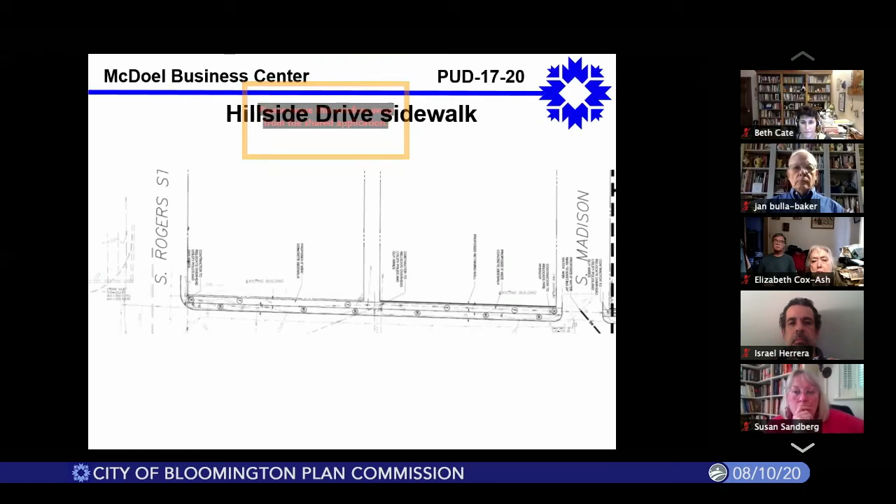That's obviously a big impact, as it allows pedestrians to get to this site and also to Switchyard Park further to the east, extending all the way to Rogers Street. The right-of-way is very narrow along Hillside Drive, so there's just barely enough room to fit in a sidewalk and tree plot along that frontage.

With this petition, the petitioners are proposing that the multifamily buildings be designed to Silver LEED certification, and a similar certification or design requirement would be carried forward with the single-family houses as well.

The petitioner has given us several perspective elevations of what these single-family buildings could look like within this development, shown here on these renderings with comparable building styles designed for this site. One thing staff would prefer to see, hopefully by the time this goes to the next hearing, would be actual elevations with more specific requirements for the single-family residences, such as depth of front porch, height, gable elements, and similar details, to give a better concrete idea of what these buildings would look like.

For the multifamily buildings, we don't have any specific renderings yet, though they have given us a couple of perspective elevations of what these could look like. As with the single-family residences, the department would like to see specific renderings of what the actual buildings would look like on this site, so we can review how that would work together with the single-family houses.

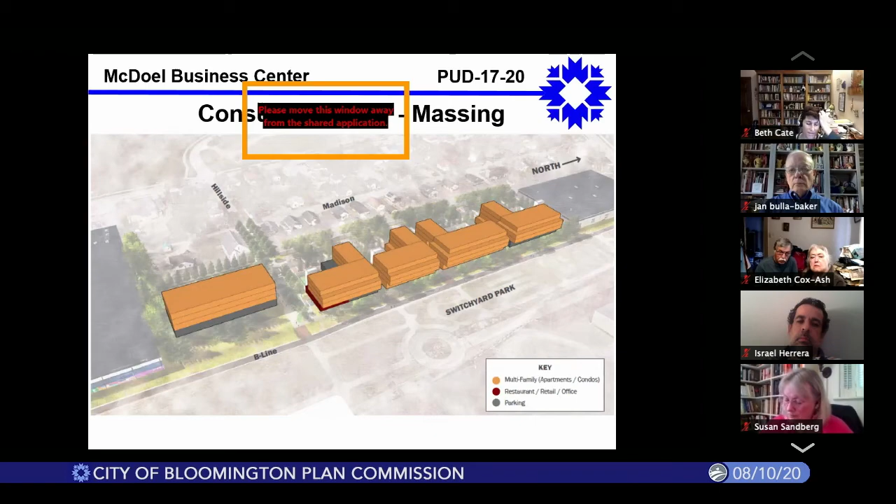One other thing I want to point out is this study was done internally—it was not a publicly vetted study that the neighborhood and other people were involved with. It was just a way to give an idea of how this site could be redeveloped to get density along the trail, while not being intrusive to the single family neighborhood to the west.

This is another rendering showing that elevation and the buildings. They're 4-story buildings along the front, stepping back to the west with parking areas up against the neighborhood to create a visual buffer. This perspective plan shows multifamily uses along the trail, with taller buildings along the trail stepping back as you get closer to the single family neighborhood.

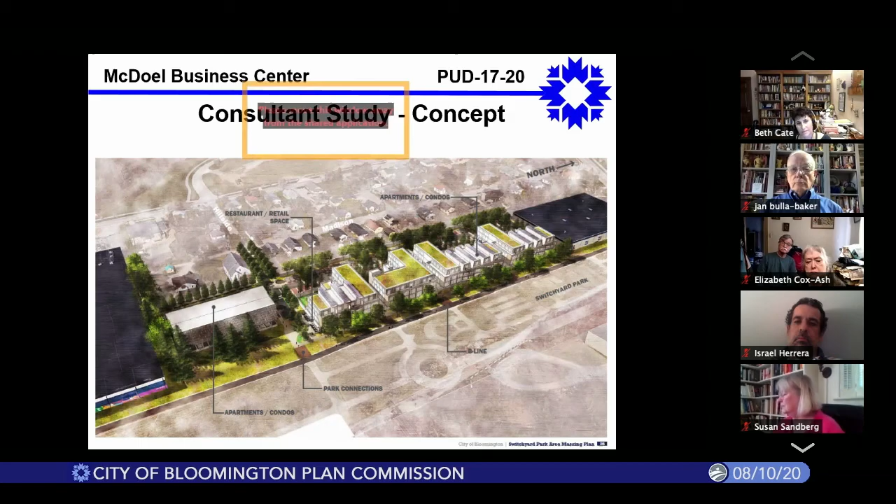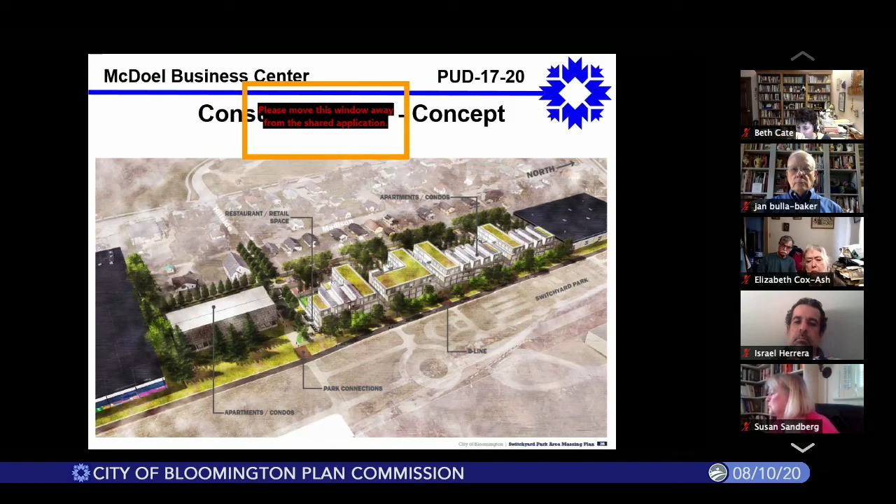While the department is not saying this is exactly what has to be done, this perspective style and density is something we really want to encourage and promote along the trail. So one area we have open for discussion tonight is the development being proposed versus what might be a better, more appropriate design specifically for Switchyard Park.

With this development, the petitioner is proposing to utilize the R4 standards for the single family lots. There are specific reductions in the setbacks being requested for those lots from the R4 district, related to minimum lot size, setbacks, and the subdivision request.

The traditional subdivision requires a minimum of 67% of lots to be served by alley. There's only one alley with this specific development, so only 43% of the lots are served by that alley.

Some of the other reductions deal with the minimum landscaped area, as well as architectural requirements for articulation of the buildings, the step backs, and parking spaces. The UDO requires a minimum number of parking spaces for multifamily projects adjacent to R3 or R4 neighborhoods, and this development would have a reduction from that minimum—112 spaces would be required, and 54 spaces are proposed within the ground floor of those two buildings. These reductions are all outlined in staff's report.

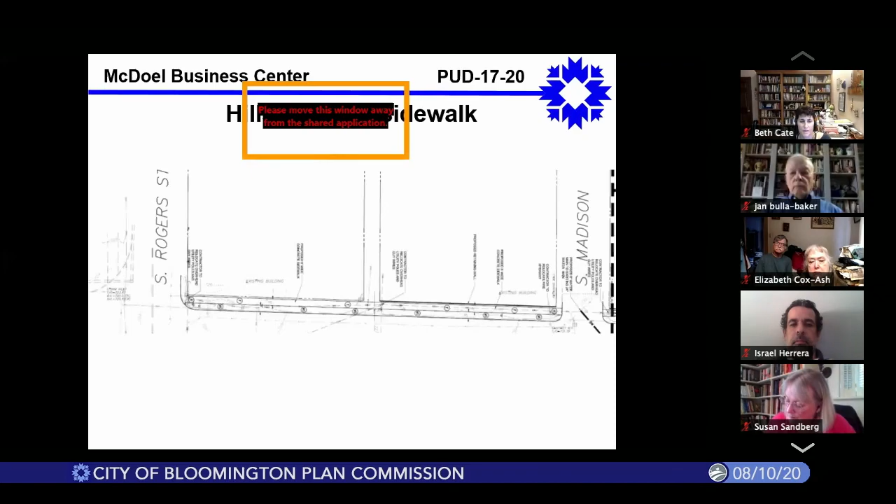All right, thank you, Eric. Is there a representative of the petitioner who would like to add to the presentation?

There are a few, I think. I don't know who wants to speak. Can you guys put your hand up on the virtual hand? I'm trying to unmute you, Jeff, if it's you.

Hello, I'm here. Great, there's Doug. Thank you. Okay, hi Doug. Yeah, I'll start this. Thank you for hearing us this evening.

Tom Brennan, the owner, is actually texting me. He's having some technical difficulties, but he would really like to speak to his petition here. As soon as he gets on, I'm sure he'll pop in. But I'll try to answer a few things and get some stuff started. I'm moving my daughter into college, so I'm in a hotel room in Oxford, Mississippi right now.

First, a couple of things. I was going to speak to the architecture, and we've taken quite a bit of feedback, and that's why you haven't seen our renderings yet of the project, because we're making changes based on some feedback we've heard.

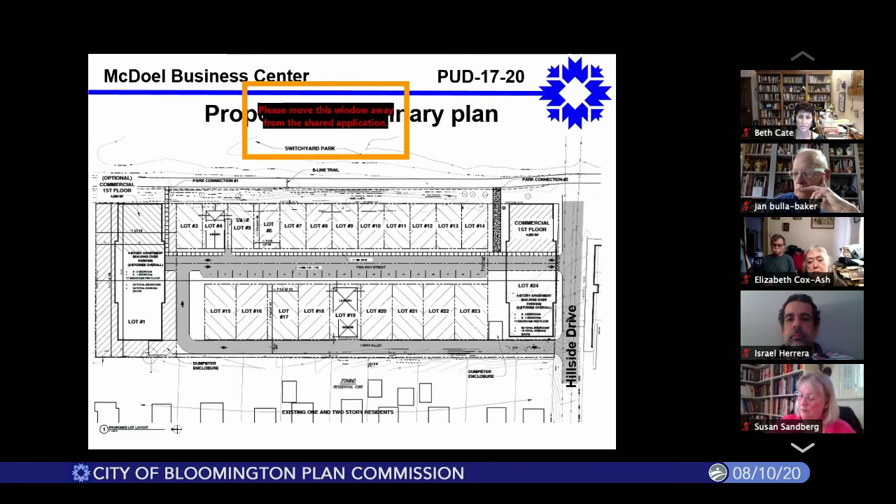So there's almost no uses for our site that would work under the current PUD, which is why we need to modify it. We've met with the neighborhood and tried to, at least some of the executive committee, and I believe my client has had some discussions with others about what we're trying to do here as far as small scale residential development.

That's the thing I think the consultant's plan loses track of completely. Tom mentioned this to me this morning - the consultant's plan is from a consultant in Indianapolis, not somebody that lives here or owns this building. Tom has looked at this, walked the neighborhood, spoke to the neighbors, and said we need some single family homes. This is not a bunch of tall, multi-story, high density buildings here.

We could certainly work on some changes to this site, but we still feel it's really important to have some houses here. We've heard some feedback that perhaps some townhomes would be desirable, and we certainly agree, because townhomes are smaller footprint - usually 21 to 24 feet wide. We've been working on a site plan that might get 12 of them along the B line that would look more like brownstones or walk-ups, facing the park with maybe parking on the back side. So there are things we're working on.

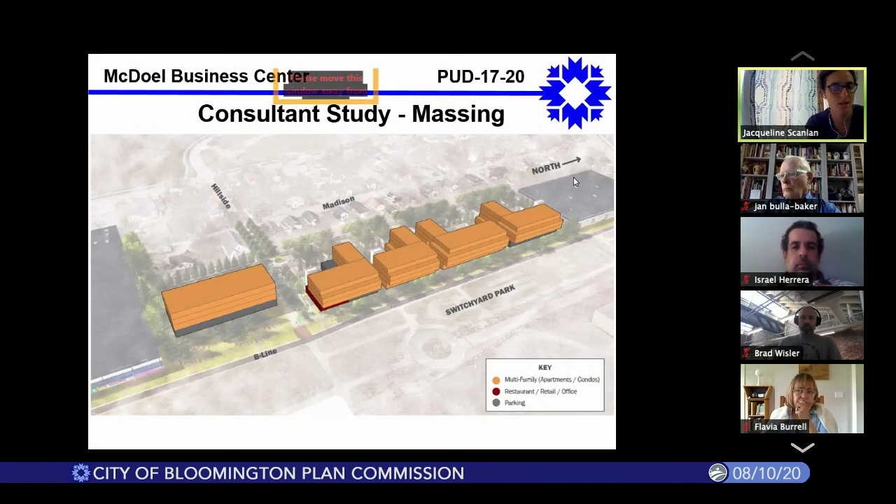Okay, thank you for that explanation. Eric, can you show the massing sheet again? Yeah, so those would be multifamily buildings, and you can see a small bit of commercial there at the corner of Hillside and Switchyard, and then parking underneath in at least 3 of the buildings, I believe. But the rest would be multifamily, either apartments or condos, so probably some mix.

Okay, go ahead. No, that's okay, I was just going to say we would have to look and see which plan was done before the new UDO was done. So we would have to look and see which zoning districts would accommodate the kind of densities thereafter, basically.

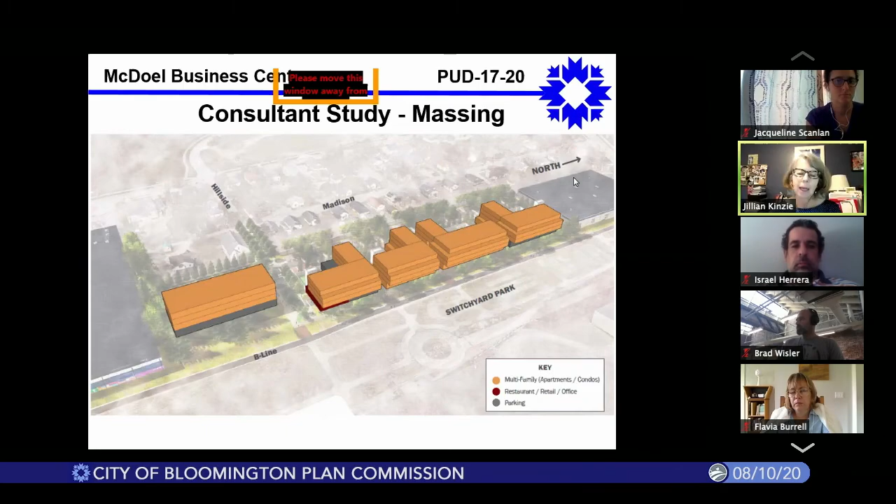Okay, I'm also interested in talking a little bit about Hillside and concerns about that as the sole entry point for this development. Is there anything about expansion? It is tight, there's no denying that, and there are concerns about traffic egress in that space. Yeah, so there just are not any other options.

There was a portion, I don't know if you can see my cursor, there was a right-of-way that extended through the site and stubbed in. However, that was vacated a long time ago, so that opportunity is kind of lost. So unfortunately, we are stuck with Hillside Drive being the only way in and out at this time.

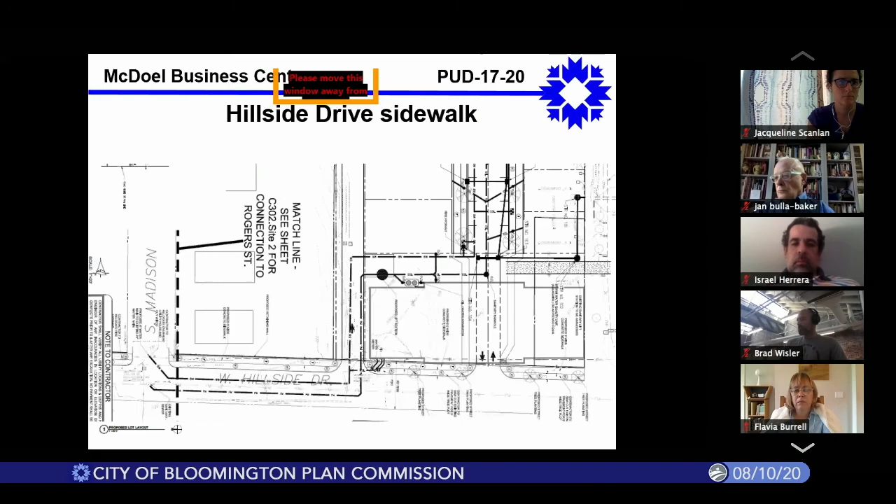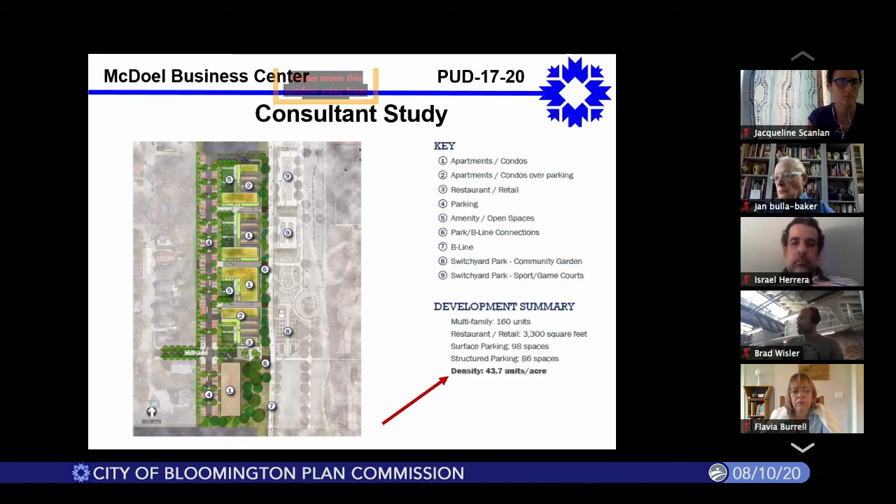Certainly, if the Storage Express building to the north of this redevelops in some manner, the street shown through here could be extended and connect to Grimes. That stub street is not being shown on this preliminary plan, but that could certainly be possible with some modifications. The other plan from the consultant shows that driveway going all the way to the north side, which could certainly be extended to Grimes should that Storage Express warehouse be removed.

Were there any other options here, other design options in the original or the consultant's design plan that were worthy of greater consideration? I can only testify to a limited extent on the consultant's plan and the information they showed. Okay, well, thank you, those were my main concerns about this space.

Okay, I believe I saw Trohn had a hand raised there. Yes, I just wanted to confirm because I heard there were 20 residential lots, and I have 21 from the packet. Just wanted to make sure we get the right number. I believe it's 21.

Does the petitioner want to answer that? I just want a definitive answer. Counting the lots that I see right here, there are 21. The 20 may have been a typo. I apologize, Jackie accidentally said that. I just wanted to make sure, sorry, Eric. I said the wrong number, it was just a guesstimate, I don't actually know how many there are. So yes, if Eric says there are 21, there are 21. Perfect, I just think that's a big component of this plan.

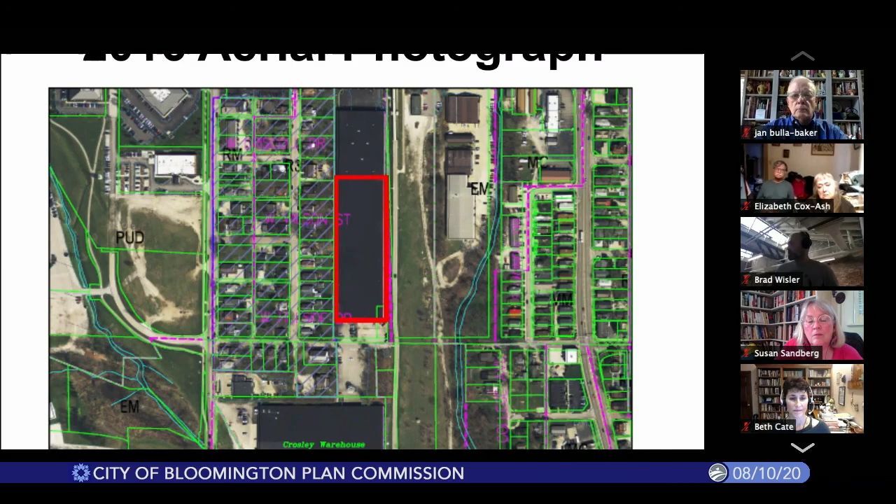Now, I would say that we've got to look at some things for the buildings on the south end of this. But when we've added the alley and the street that we've designed down the middle of this development that would connect to Hillside, it also meets the UDO standards for a public street, other than going under the building, which is something we're working on now in our designs.

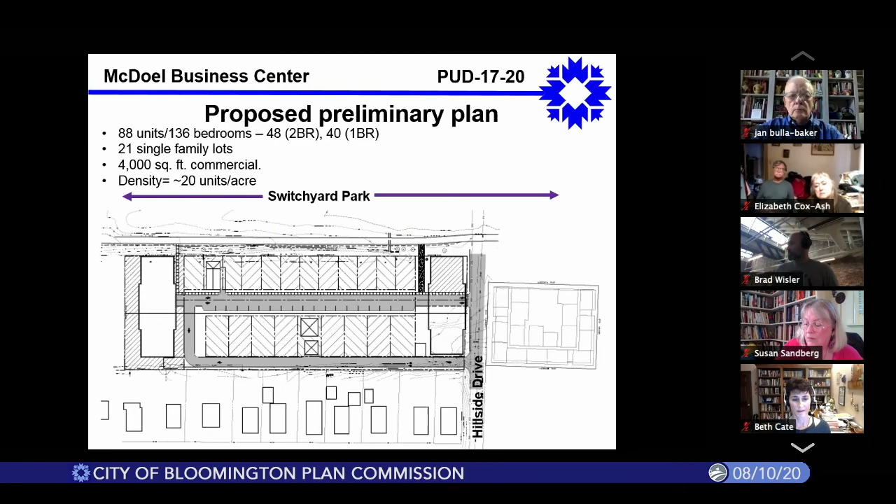But the street that we'll show - and there's a more updated version of this drawing that has the parking and the street trees and the tree plots - that's something that we have worked out. That's why, again, our lots are actually not as large as you see in this development, because that street width and required right-of-ways reduced the size of our lots.

So we have had fire truck access in mind other than getting under the building, but we will meet their turning radiuses. I mean, that's been an issue we've had since day one. And I would add that the consultant's plan, I don't think, addresses that at all. This has always been a dead end development because there's no other access. You're not bringing a fire truck down the B-Line Trail unless you get somebody really mad. So we've always looked at how are we going to have fire truck access. And I think that helps answer a question that was raised earlier.

The only other thing I would say is about the environmental portion. I don't know if there's been a phase 1 or phase 2. Again, all of these things cost money. And as this goes forward, Tom has invested a lot of money in this PUD to get it to this point that you see now. And I'm sure any bank, any financing is going to require a phase 1 and phase 2. So that'll be taken care of.

This whole site has changed. It used to be in a floodplain, most of Switchyard Park. And of course, the city had those maps redone. So this building - there was about 10 feet of the very southeast corner of this site that was in the floodplain that got removed when the flood maps were revised, which makes development possible on the entire site. So hopefully that answers some of the questions that you've had.

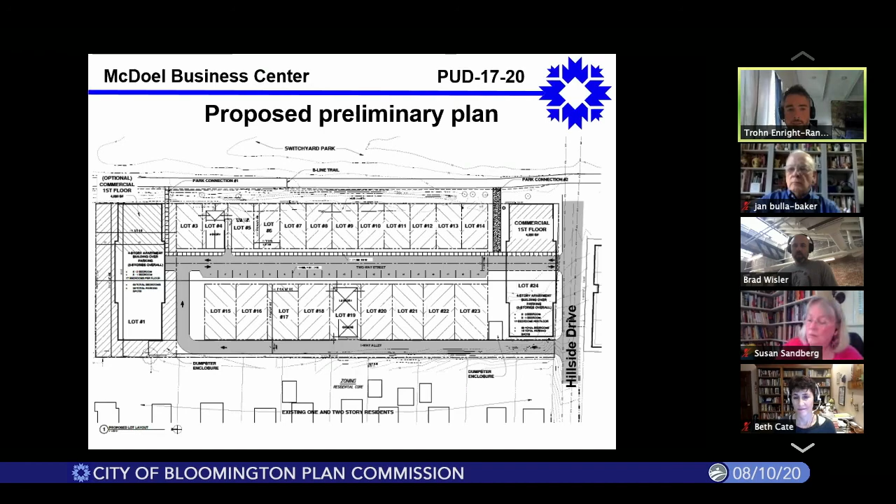I do have a comment, not a question, but this is the time for that. It sounds like my observation is there's some mixed feelings. Sounds like some people like some of the aspects of the plan, and some people think some of those aspects need to be reworked. Kind of my quick summary of this is...

We're looking at 100 - and I'm not talking about the south lot, it's not part of this, so I'm just going to exclude that from this conversation. So we're looking at 124 bedrooms with 1 and 2 bed units. That's pretty good as far as I like not seeing 3 or 4. But then you only have 21 residential lots. There's a huge contrast between those two.

It doesn't make sense. It states in our packet that the comprehensive plan is clear that adjacent to the Switchyard Park should be planned with increased residential density for the benefit of a wide array of residents, not just a select few. I think that's exactly what we're looking at here.

One thing I would like, before we just move this to a vote, is maybe a little more direction moving forward. Or, you know, we're going to potentially see the exact same plan.

Townhouses seem like a great idea, maybe turning some of those into condos. I want to elaborate on that a little bit, because I think parks are extremely valuable for communities.